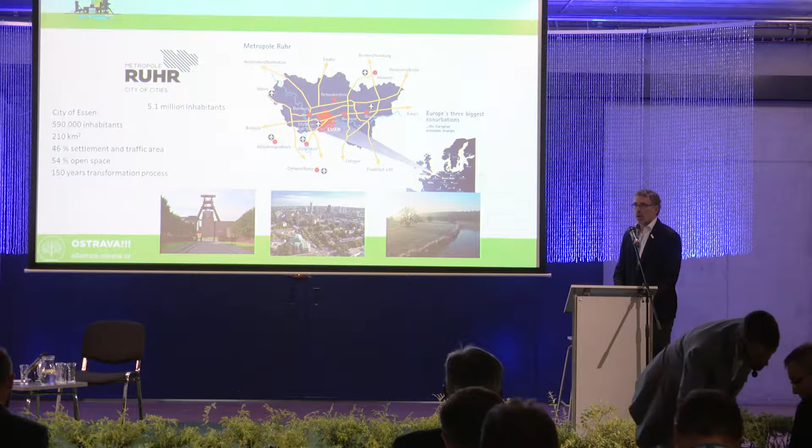The city of Essen is located in this region. We have nearly 600,000 inhabitants, and we experienced, I think, the same as Ostrava, 150 years of transformation. We transformed from a very agricultural region to a very fast-growing industrial hotspot in Europe. With the crisis of coal and steel production starting at the end of the 70s and 80s, we saw very high unemployment rates. We still have an unemployment rate of about 11% on average, and unemployment is most concentrated in the north of our region because this was the latest industrialized area.

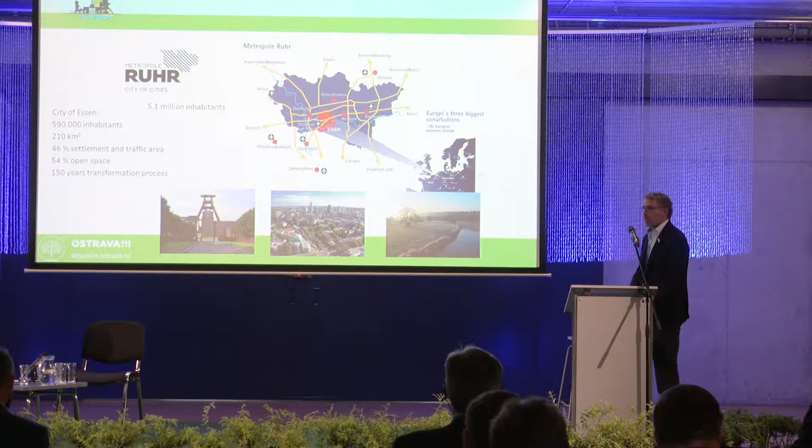We will now focus on the challenges and how we try to design the transformation of our city and our region.

Essen was the European Green Capital in 2017. We won the award against a line of different cities in Europe. We started to think about applying for this award already in 2010 when our region was the culture capital, but we tried 3 times with our application, trying to show the European Commission how our strategies to change from an industrial legacy to a green future are sustainable and with a long breath.

The Green Capital Award has 12 indicators, and these indicators, also during the application, were good measurements for collecting basis data - like Ostrava may have also experienced. For the application, the whole region collected data across these 12 indicators, so we now have a very good basis of data on climate change, traffic, and biodiversity. We have a regional measurement, and also for our city a measurement of how we are developing and how the changes we are implementing take effect on these 12 measurements.

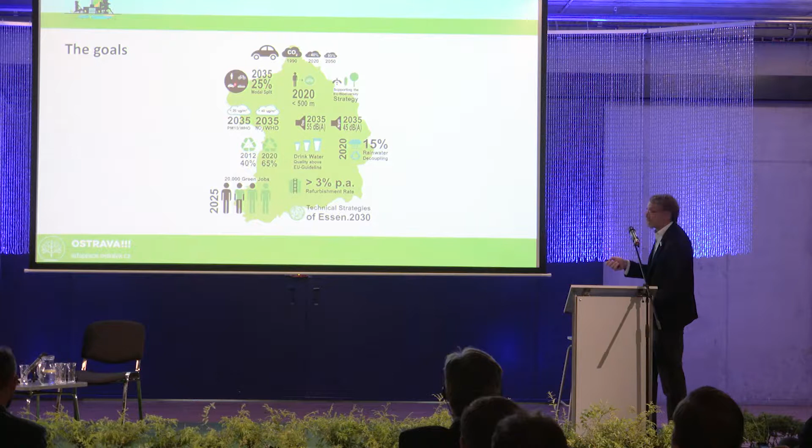You see many things here, like acoustic measures, CO2 emissions, which is very important, and traffic - here we try to change our modal split so cars make up only 25% of traffic; actually it is over 50%. So we are not the best in all these indicators - we are still struggling and have a job to do in the future. You see nitrogen dioxide emissions, and drinking water refurbishment rate. These are our goals for the next 25 years. It's not that we are already done with that.

The reason why the jury gave us the award is the significance of green infrastructure and the regional cooperation. Our region is a region, not only a city, and we have a very short overview of our green history.

On the left side you see city planning from 1920, so it's 100 years old. We had a city planner called Robert Schmidt, who is also the founder of the regional cooperation Ruhr. Essen already had a green infrastructure plan, and some parts of it are still visible in the city. Not everything was preserved, but these green rays, as he called them, bring fresh air to the city center. He was a kind of visionary in times when coal and steel production and money-making ruled most of the city's development.

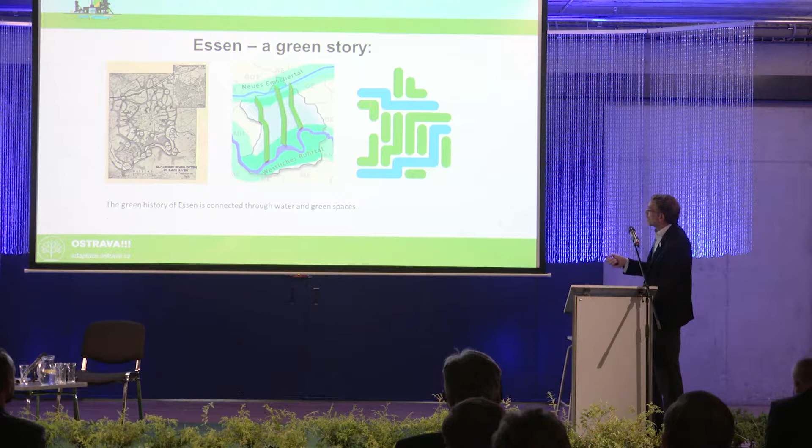The Emscher River in the north was completely used as an open sewer until recent years. Here you see the symbol of the Green Capital: we have two clean rivers and green connections in between. We designed this logo for Essen for the Green Capital year.

The regional cooperation is a tradition in our area. Here we have the Emscher River, flowing about 100 kilometers through our region. Essen is in this area, and you see very well that these small rivers go through the cities all over, and they all flow into this Emscher River.

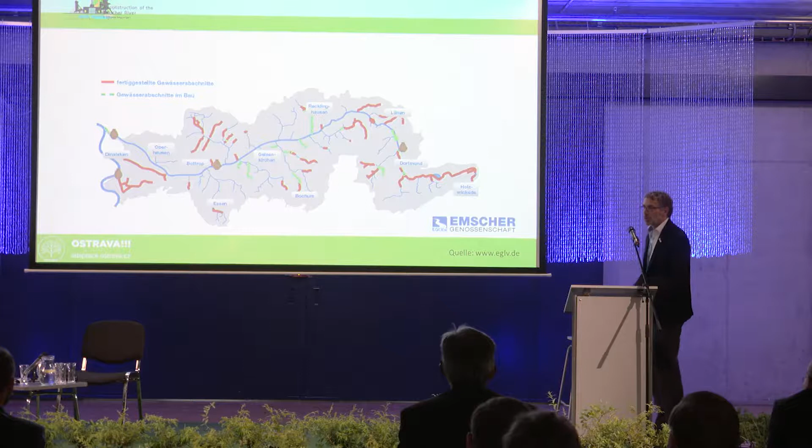100 years ago, this whole system, everything you see on this map, was converted into an open sewer system. Due to the decreasing level of the surface because of coal mining, the surface decreased up to 25 meters in our region. This whole river system stopped working, and it was rebuilt 100 years ago into a technical open sewer system, which affected the whole city areas along these rivers with very bad smell every summer, because an open sewer is an open sewer and nothing else.

So this is one of the biggest projects in our history, in the last 100 years: to reconvert this into a closed, separated sewer system to separate rainwater from the dirty water. This also lets us handle our water cleaning facilities much better, because the rainwater is no longer mixed with the wastewater.

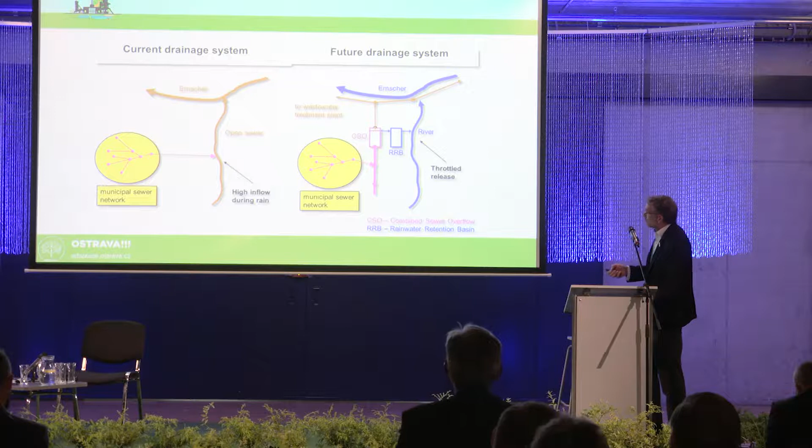Here you see some pictures of the big drainage systems we are constructing throughout the region. We have 51 kilometers of the main channel and 73 kilometers of separated sections, and deep shafts that are 10 to 40 meters deep, 113 of them, to reconstruct this infrastructure. We've been working on this for 30 years with the help of European and German funding.

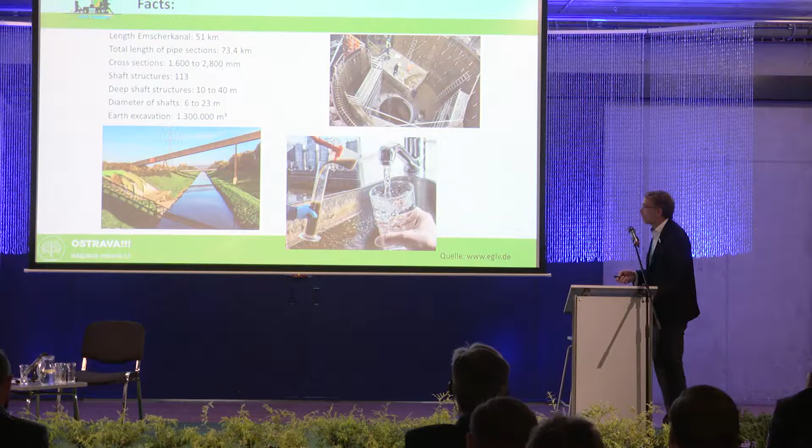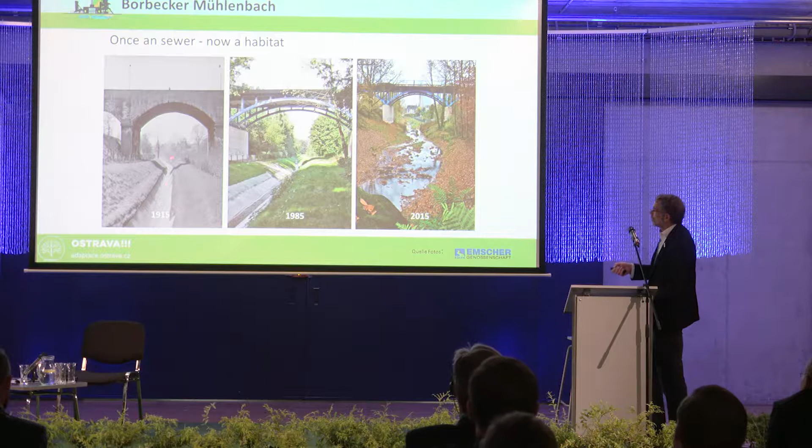You see an example of how it changes, from a sewer to a natural river. Also, here's a very nice event from last year: this is a fish called the Emscher Groppe, a specific kind of fish known in the Emscher River. People thought it had already died out and none were left, but they found some of the Emscher Groppe in an old side channel of the Emscher River. So this fish is now being brought back to the river.

So here you see just some pictures. Can you help me by stopping that fast forward? These are just examples from converting these infrastructures. So I try to head on. I'm getting a little bit out of concept, sorry.

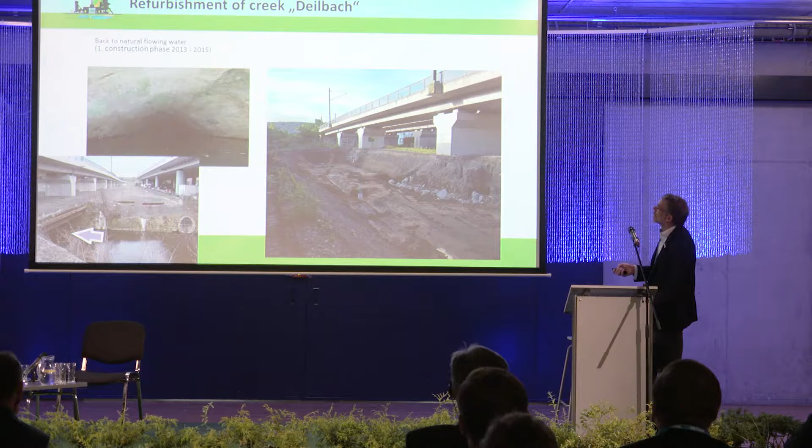Maybe if you push one forward, can you push the one backward please? Once more. Stop there please, thank you.

So we have one strategy we've followed for more than 10 years: the program New Ways to the Water. You see here the two rivers and the green connections, and this is a master plan by Andreas Kipar, landscape architect. We developed several small projects along these ways, realized with the work of long-time unemployed people in green infrastructure. With more than 500 single projects, we designed these green lines with cycling paths amongst the rivers, converting the sewers over the last 13 years. This is also a social project implementing green infrastructure and giving infrastructure for cyclists.

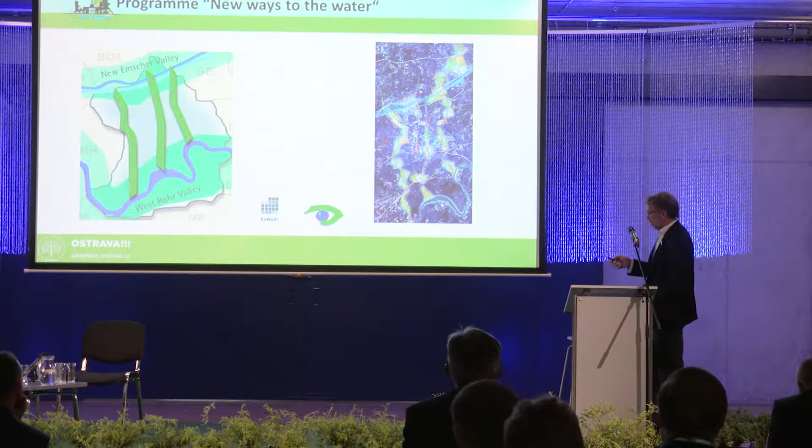This is an example of what I mean by integrated green and blue infrastructure, so we can also handle social and other demands in that.

So please go back for several of them. Stop here, thank you.

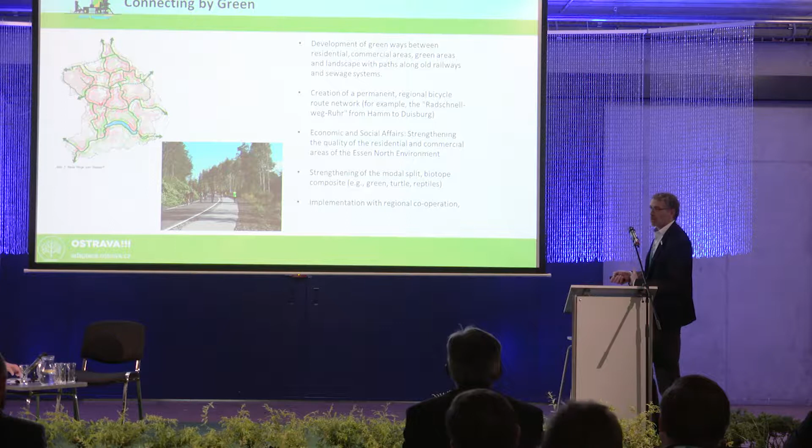So here you see what is done after the green ways, the green way to the water. We developed a green infrastructure network. This is an example of a cycling lane with separated walking on an old railway track. We use the old infrastructure the best way to bring a new quality of life.

Please, forward one. No, backwards.

Now I show you 3 projects. The red line is the regional cycling highway, we call it. This is a regional project organized by the regional cooperative of all cities, but every city has to participate with its own departments. The money comes from the state government. So we built this cycling highway to connect Essen to the west. It's already finished, connecting Essen University and Duisburg University, which are working in cooperation. On this cycling highway, I'll show you 3 projects.

This is the city center here. This area is an old railway transportation station. This is the old area, a very huge area of the ThyssenKrupp steel production. And this is a new built infrastructure in an area where we have social programs, bringing new quality of life and housing there.

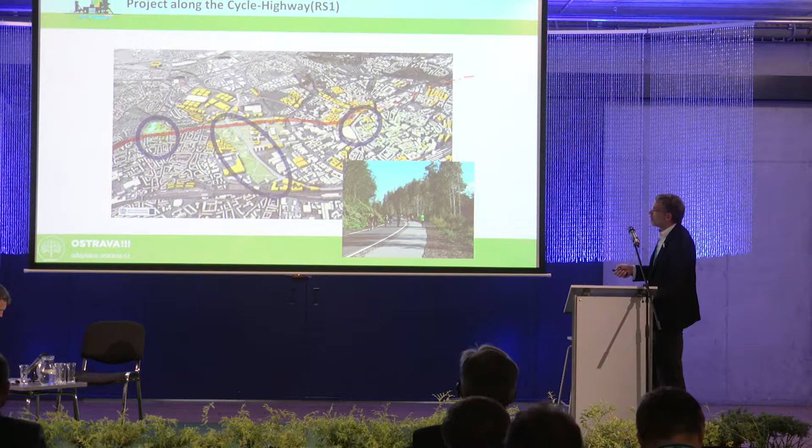So maybe next, please. Go back again, this one, more.

This infrastructure project is the Krupp Park, also designed by the Kipar landscape architects. The demand here is that this is a very contaminated area, and we had to manage the contaminated soil, moving it to get other sites for new building projects. We needed to manage that soil.

So we have this project developed, called the 7 Hill Park. We designed, the architect designed, the hills from the contaminated soil, secured in a waterproof cover. So we need to manage the rainwater. You see this Krupp Lake—it's very close to the housing areas on this side, and it's also retention for rainwater during heavy rainfalls.

All this rainwater goes to the Emscher system, the new river. This infrastructure also brings lots of sports facilities to the suburbs, and we can improve the quality of life. We have managed our soil there, and the rainwater is prepared for the future. So the next, please.

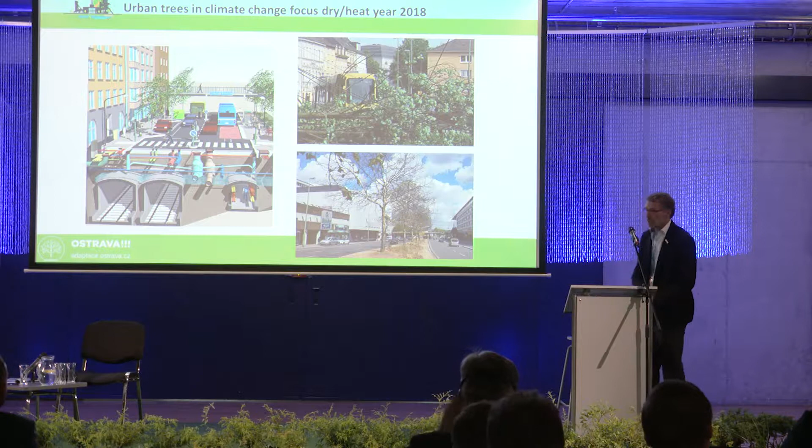You see here the results of the storm Ela, and here the results of this summer. We have trees that are already some years old, but in this area there's an underground line beneath them, so these trees run out of water very fast because the roots cannot go very deep. We experienced a lot of problems with our young trees, up to four years old, so we had several programs to bring water to the trees.

We have this Baum Adapt, a tree adaptation research program. I'll go over it briefly. We have a cooperation with universities to work on which kind of trees and which conditions they need to grow in the best way, because we experienced that a well-grown tree has a very good function for our problematic temperatures.

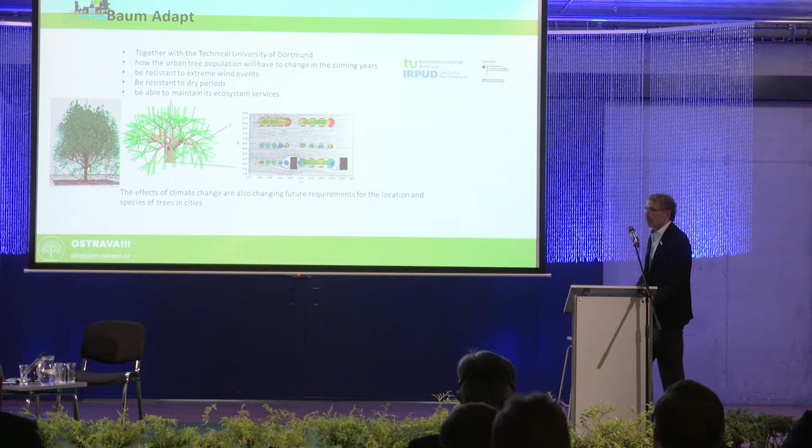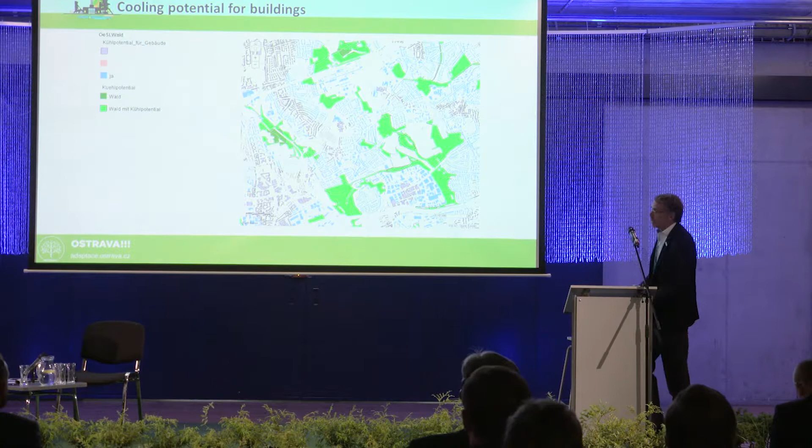Maybe the next, please. One back, please. Oh, no, sorry, one back again.

So we have this tree management. We work on what kind of trees to use, and it takes a very long time to change the trees in the city because they have to be productive at a certain size.

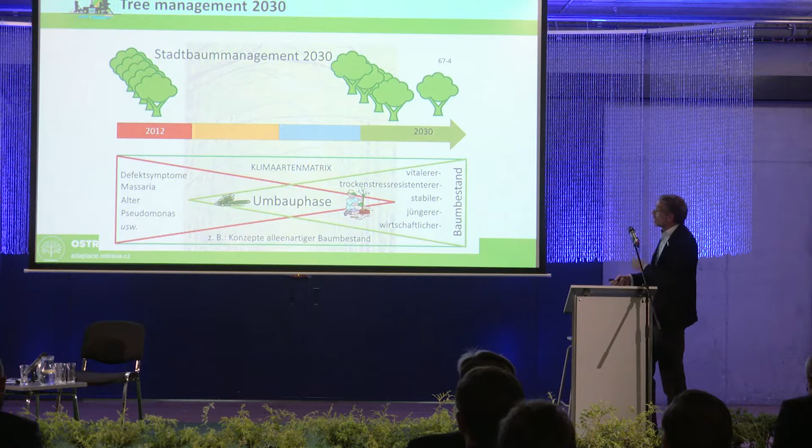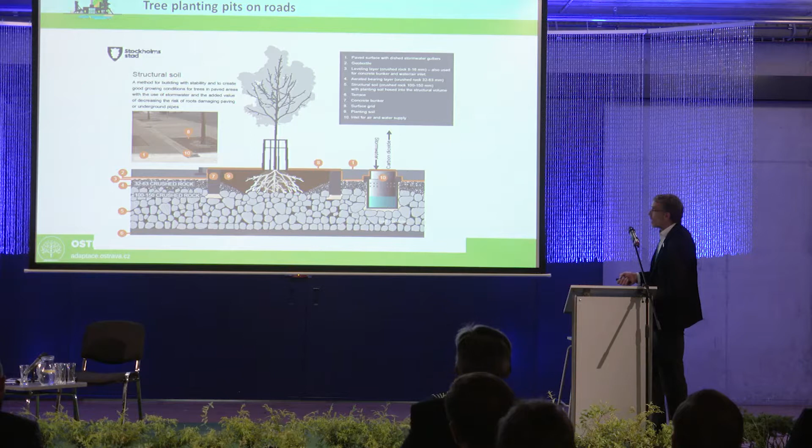This next slide, I think the last one, is an example from Stockholm. We saw a very similar picture from Teresa, from Prague. Here you see a young tree in a pit connected to a rainwater drainage system. You can retain heavy rainfall and collect the water. The water goes into this crushed-rock-filled area and can also be stored there. The tree will have enough water even in dry seasons to grow strong.

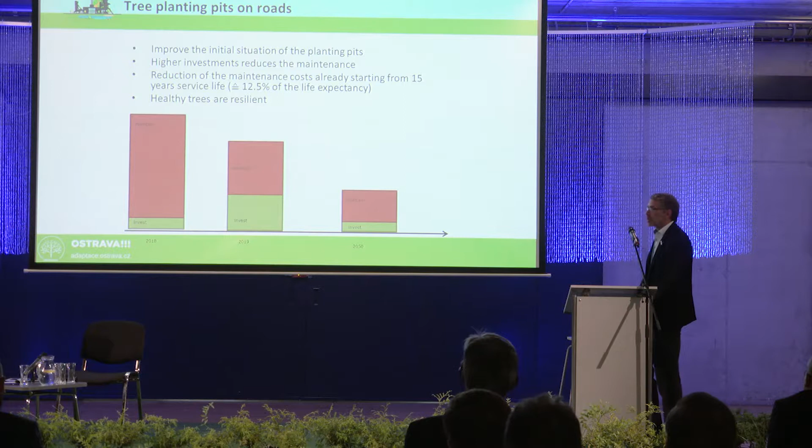Here you see a very simple graphic. If you do not invest in your infrastructure, this is an example with trees. A small investment in a poorly built tree pit will result in high maintenance costs over the next 20 years, because the trees will be under stress, not very strong, and in storms they will be damaged and parts will fall onto the roads, requiring frequent maintenance. If you invest in the base of the trees, you will only have to invest once in the tree pit, but maintenance will decrease significantly. This is also a matter of life cycle costs of this infrastructure, and you can implement this approach in other parts of the green and blue infrastructure too.

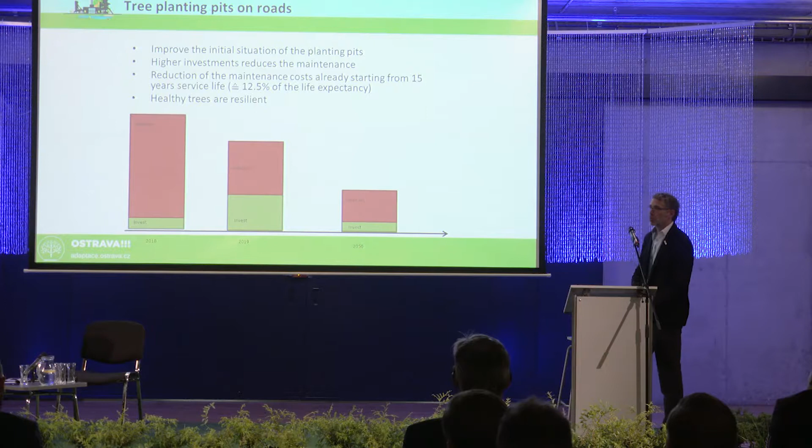It was really nice example for implementing green and blue infrastructure. So I don't want to interrupt you because it was really nice. I'm a little short on time. It's okay, so this is your microphone. Now we have only 5 minutes for discussion.

I'll start with a question from Michal Veselý: who are the drivers of the green development in Essen besides the city?

The drivers of green infrastructure have mainly been the city in the last decades. But now we're seeing that investors are also interested in green infrastructure. We have one investor bringing a new district, building around 2,000 apartments in Essen on a brownfield close to Krupp Park, starting next year. His planning is in some ways better than our sustainable planning, because he's experiencing that he needs to bring green into his planning so that people will want to stay there. He's already seeing that having a cycling highway on his development is good, because people also like to cycle.